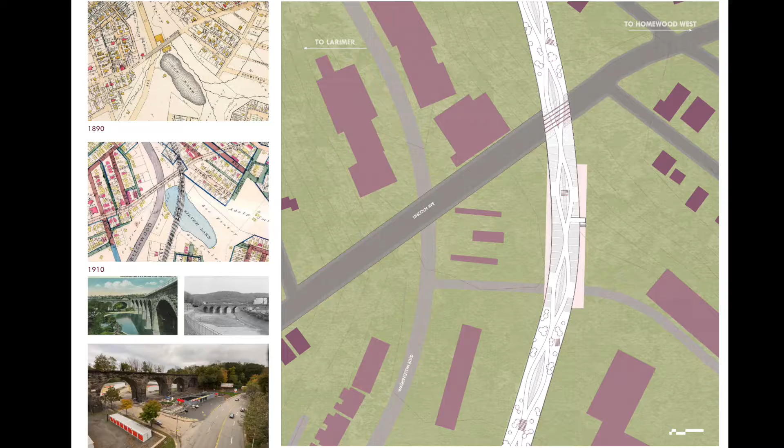The chosen site sits underneath the retired Brilliant Cutoff Viaduct, in view of the Lincoln Avenue Bridge and within the footprint of what was once Silver Lake. The viaduct currently exists as a spatial barrier and poses the question of how old infrastructure elements can be reincorporated into a modern urban system.

My hypothesis is an investigation of how we can use the viaduct to reconnect local communities while paving the way for larger connections outside the community.

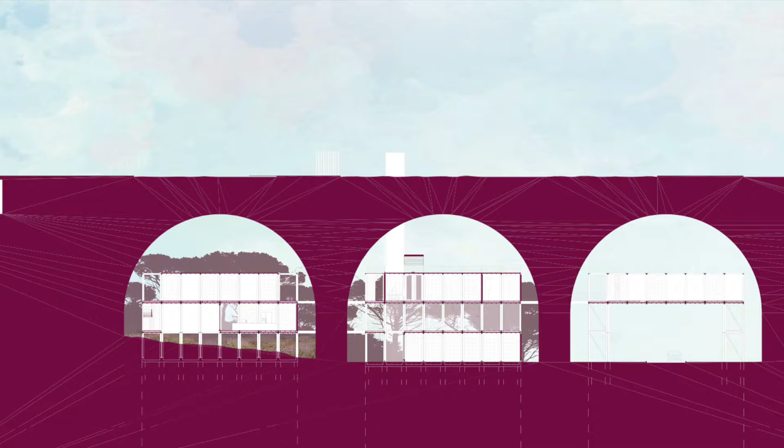As a cultural community center, this project seeks to provide disadvantaged communities with resources and activate the viaduct to be a linking structure that could potentially extend across the river to Aspinwall Riverfront Park, creating a layering of connections without gentrifying the space. This project emerged from an exploration of weathering and post-occupancy through the lens of accessibility, inclusion, and accountability, documented in this series of vlogs.

We started this semester considering weathering, and I came to the conclusion that we need to accept weathering as inevitable, and perhaps weave it into the narrative of the architecture, whether it's due to elements or anthropogenic interactions.

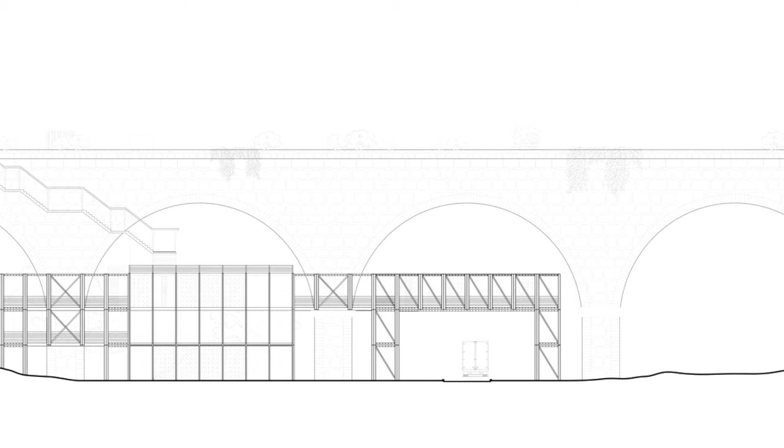My proposal is an open-ended and ongoing project, meant to be continually added to and changed by the surrounding communities. Post-occupancy is also closely tied to this, and it made me consider the lifespan of my building. While permanence has its place, temporality is much more adaptable.

So I therefore decided to combine the two with a permanent scaffolding and reconfigurable, customizable panels, similar to Le Corbusier's Heidi Weber Museum, to respond to the needs of the community.

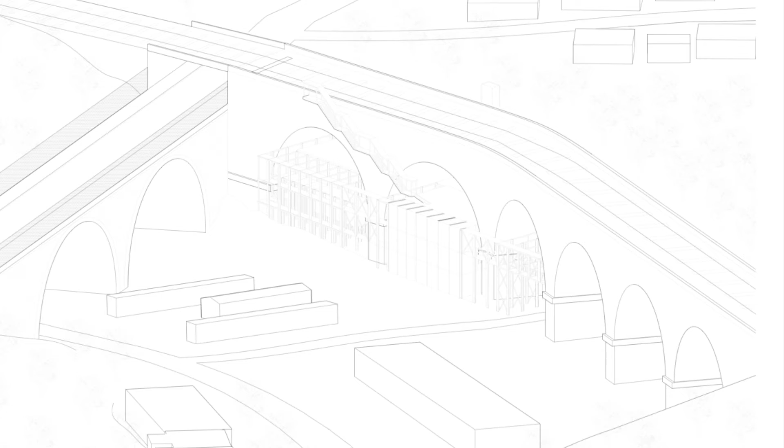In this way, the space becomes a collaborative, people- and place-oriented hub that exists in the cross-category of infrastructure and architecture. The aim is that the program can be changed in the future, but based on the current needs of the Larimer and Homewood West communities, I chose to center the current programs around food, senior and youth centers, and gathering spaces, with the viaduct above being used as a community garden for the two neighborhoods.

The elevated green space also winds its way northward through Pittsburgh, to be influenced by contributions from the immediate communities around those parts of the track, thus becoming part of the fabric of Pittsburgh while also reconnecting the people of the city.